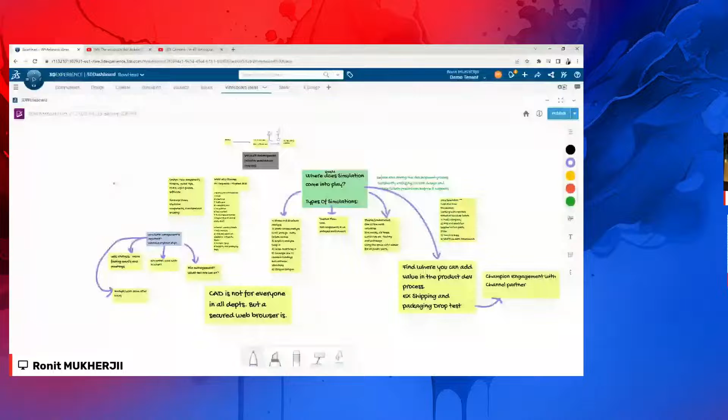So any medical device company would have - let's talk about the different departments you'll have, Brad, in a medical device company. What are some of the departments you think you'll have? Well, obviously R&D, engineering. Were those separate in your experience? Most of the times they can be combined together. So R&D separate, engineering... well, then you might have testing might be separate from engineering. I'm not sure if production and testing might be a different department. Manufacturing, whether it's in-house or you use outside vendors.

Then, of course, you've got sales and marketing - that would have a big impact. You probably have a big legal staff that has to deal with regulations. Those are just the ones off the top of my head. What have I missed? I'm sure there's a lot. You nailed most of it. So I took a little note down.

So you've got mechanical, electrical, you've got software - you've got a PCB, and software running everything behind it. You've got a software team, a manufacturing team, regulatory like you mentioned, doc control - there's a doc control team managing all of your documents.

Like every ECO process, you're gonna have that. And you also have shipping and warehouse - a team that's in charge of allocating lot numbers and taking in shippings that are coming in. So that's a whole different team as well. And every time you make a change, you have to make sure that every single department approves that change. That takes time, man. That takes time.

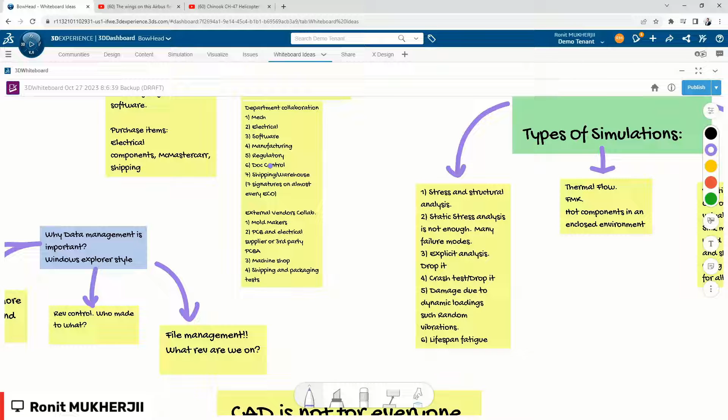So you want to make sure these changes that you're making are less and less. You want to be able to analyze your changes before you make them, and before you go to the ECO process. That's the key.

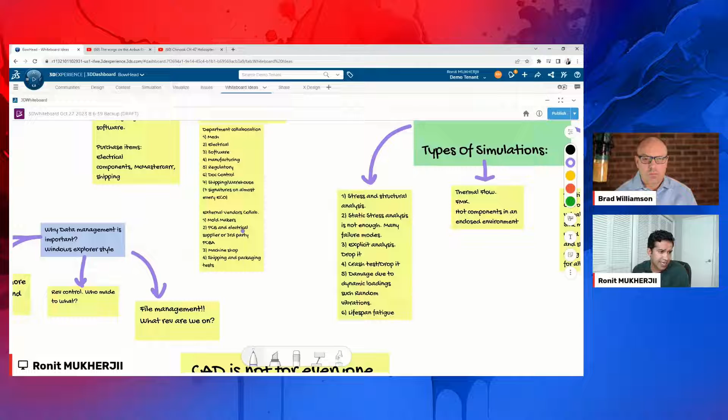One of the other challenges I ran into when I was working in the industry is, let's talk about mechanical, electrical, and even software and manufacturing. All these four departments will be okay using design tools, simulation tools, electrical tools or things like that. But every other department, they're not okay using SolidWorks. They're not okay using simulation tools, and they don't have to, because they're not running any analysis, they're not running any design work. But they depend on the data - whether it's an image, a PDF, a drawing.

So how do you deliver the data to them? They don't have SolidWorks licenses, they don't have simulation licenses, but they need to see the results. They're a part of the ECO process. And if you're justifying, hey, I'm changing this component's size to this because it's breaking, they need to see that results to be able to approve that ECO for you, right?

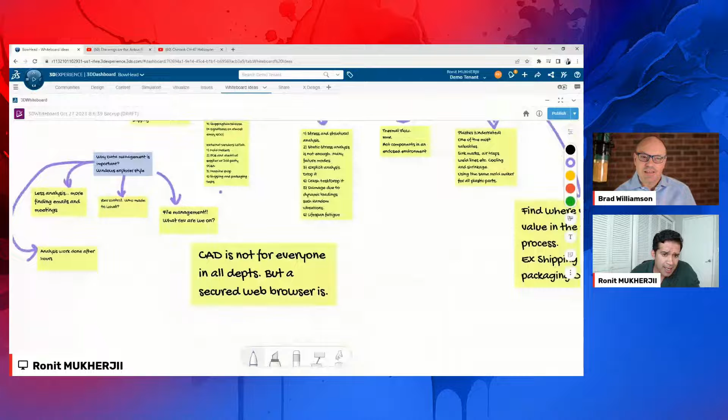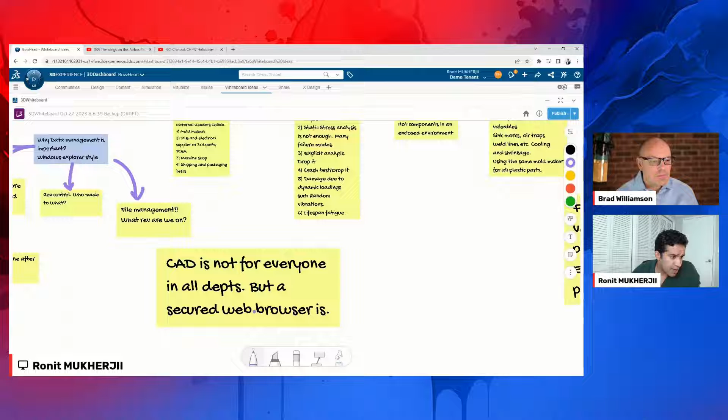The reason why I was bringing this up is that these tools are not for everybody. Regulatory doesn't want to use it, doc control doesn't want to use it, but the web browser is for everybody. Everybody loves a web browser, and they can access a web browser.

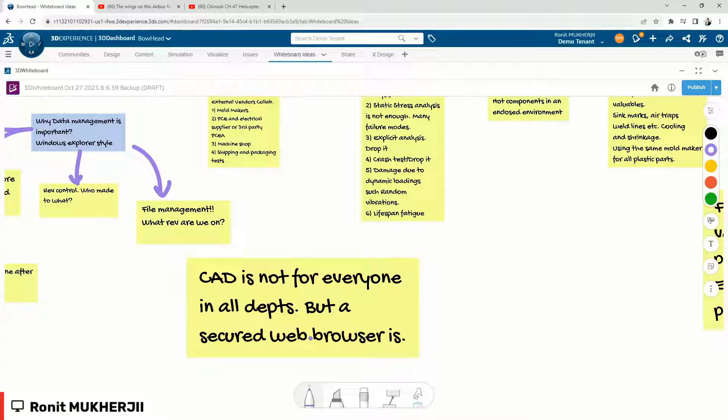So I want to show you, Brad, what I have over here. This is my platform, this is my dashboard. This is what I'm working on right now. It might seem like too much, but let me give you a quick rundown of what we're looking at.

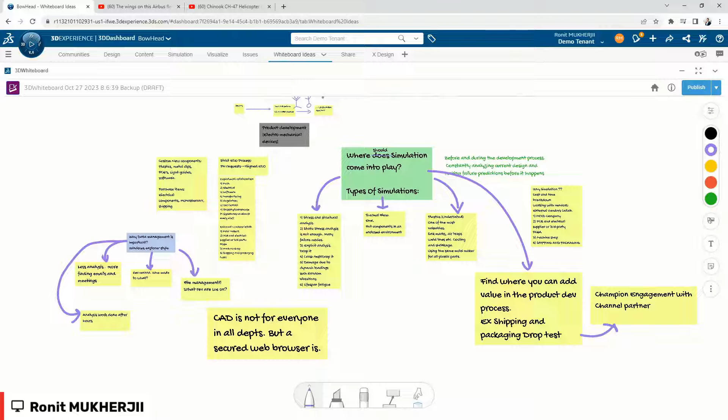I've got a couple of different tabs up here. This is my whiteboard ideas tab. I've created this tab where I've got a lot of information in my brain, and I like to throw it down so I don't forget about it, or I can come back to it. So this is where I jot down all my information, things I want to work on eventually, and some random ideas.

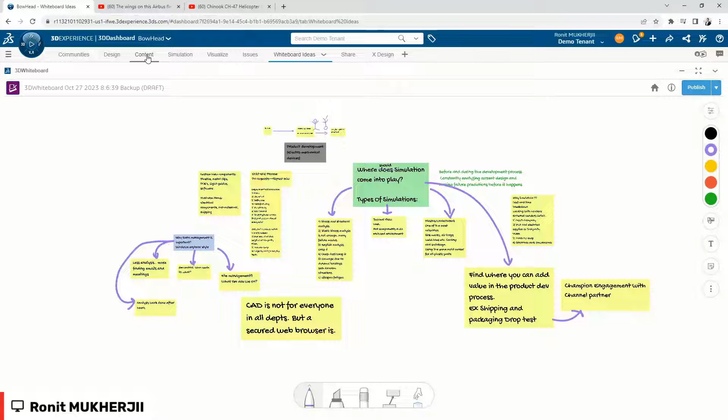Now let me take you to this content tab. What I am working on is this Bowhead model. You must have seen, our team created these fantastic videos of what's new in 2024 — this was the model that was used. That's our customer, Bowhead in Canada, and they make off-road cycles for people with IDD or any kind of physical limitations.

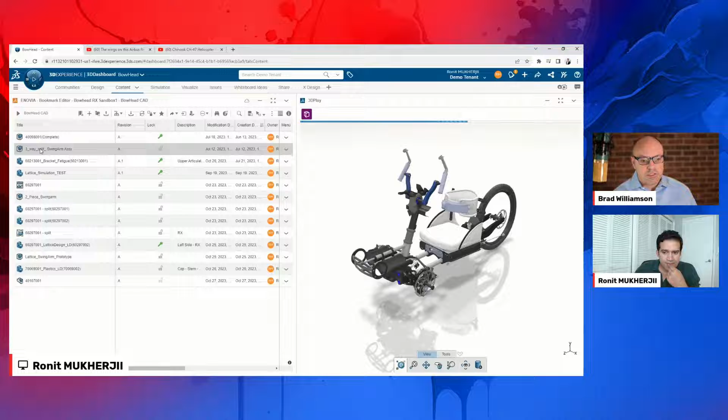Correct. Oh, wow, I mean, you made some mods to this. This is cool, I wasn't expecting to see this. I mean, surprised, right? I wanted to make sure you're surprised on this one.

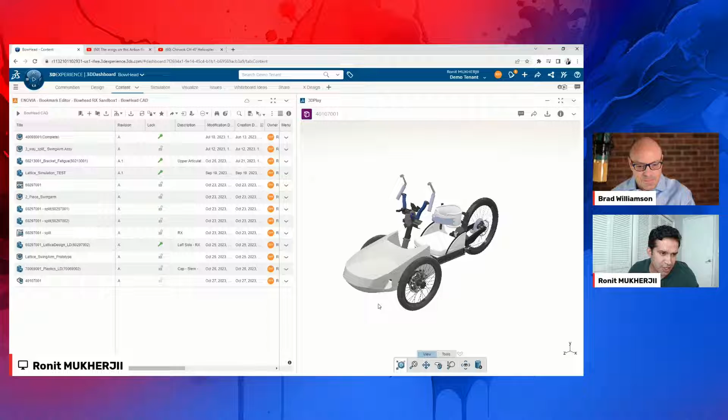So I want to actually show you what I've done in this dashboard and how I organize myself, and then I'll jump into some simulations. There is an issues tab. When we were looking at this entire Bowhead model, we tried to dissect it in different places to understand how different components will act and behave when we run it through some simulations.

Starting with just a basic swing arm design — it all starts with one design, and then eventually you make revisions and updates, and there's a whole process until you get to a final design that you like.

When you're working in a team, Brad, let's say, if you're working in a big company, you're going to have one person that's an analyst, one person that's a designer, and a couple of people that can do a few different things — lots of contributors. But when you're working in a smaller company, you don't get that luxury, and you just have to wear multiple different hats. Sometimes the designers are the analysts.

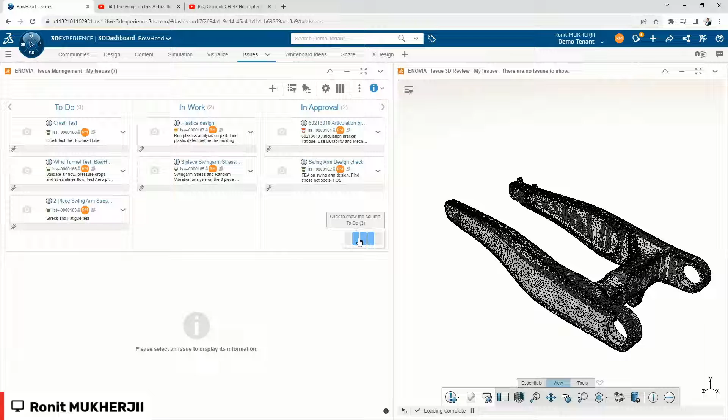And I actually like that — I want the designers to be analysts, because now you get to design and analyze at an early stage. Whereas an analyst, if you think about their role, gets the design to analyze almost towards the end — 'we've done all this great work, can you analyze this and make sure it works?' I believe that's a little bit of the wrong approach. We need to be analyzing these things as we're building it.

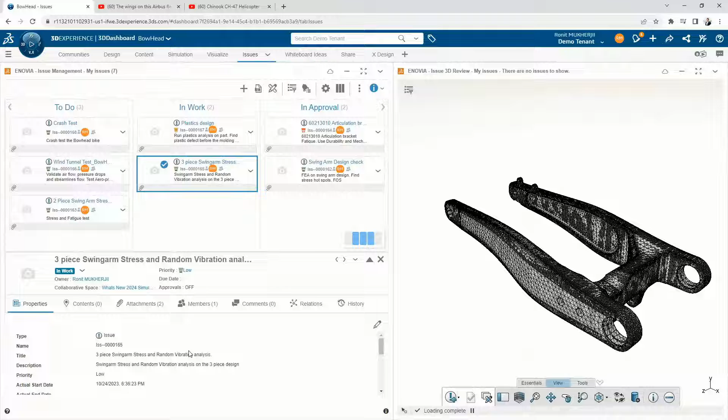So if I'm making the swing arm, I want to analyze the swing arm and see if it works well or not. I have a few different tasks, or issues, that were given to me, where I can select one and it gives me all the information about what I need to do. So this is a two-piece swing arm — stress and fatigue test. Just like that, I have different tasks I've created based on this Bowhead model, covering all the different areas, including a comparison between a two-piece and a three-piece swing arm test.

I was talking about this plastics design — I want to make sure that this plastic design is good to go. And then there's an articulation bracket, a fatigue-type issue I want to talk about. So there's all these issues that I've created in an organized manner.

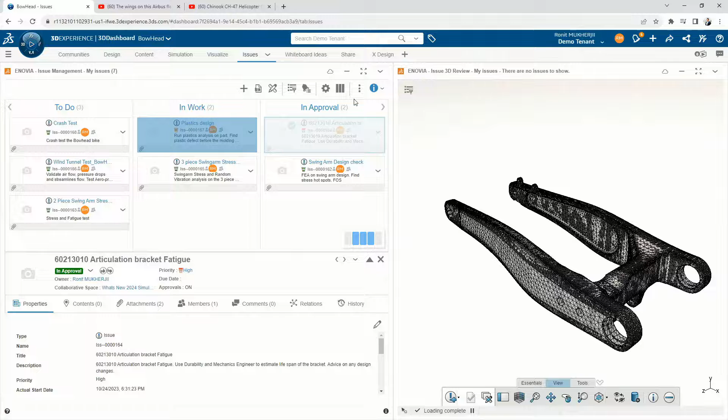If I show you this data grid view, I can see what's to do, what's in work, what's pending approval, things like that. So it kind of gives me a little bit of structure. Man, when you don't have this kind of structure, you have to go back into your emails and kind of see what you have to work on. I used to write this on a Word document or a sheet, all the things that I have to do.

I'm trying to think, if you work in an environment like this too, where you're managing these multiple tasks within a project, how do you keep track of those? I'd be glad to hear from folks in the viewing audience how they're doing it. But yeah, the first thing that came to mind was like, well, I'd make a Word doc, or probably an Excel spreadsheet would be my go-to if I didn't have a tool like this.

I used to scribble it on a paper, and I would go back. Yeah, or a sticky note. And I could not recognize my own handwriting. Sometimes I was like, oh my God, what did I write over here? Is that a 9 or a 6? I can't tell. That happens.

So this has given me some structure, and I really like it. So I have issues, I have tasks, I know what I need to do. I know the priority on it, and I can address it as I go. Okay, so which one are you going to tackle here first?

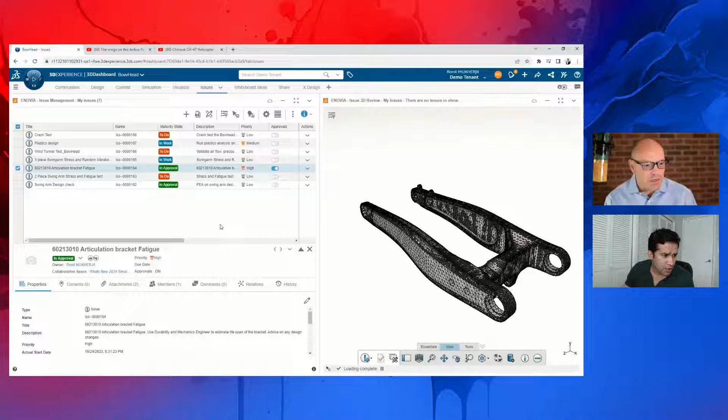I'm going to show you a bunch of them. So this is just issues. Now let me take you to the simulation tab. I have addressed, or I've started working on some of the simulations. Some of them are completed, and I don't want to go search for it again and again, hitting search in a demo to look for what that simulation is and where it is. What I've done is I've organized all the simulations I'm working on in this bookmark editor.

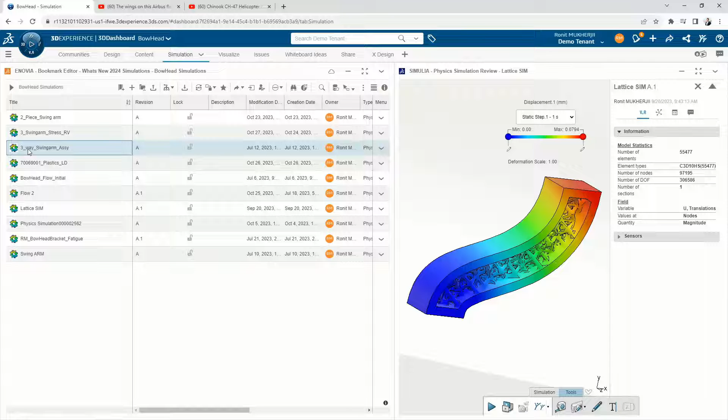On the right hand side I've got a review, like a lightweight results review that you can use. So we were talking about that, the swing arm test, the 3-piece and the 2-piece. Yeah, 3-piece versus 2-piece. Okay, so I've run these studies, and I can open this down the road.

But like I was telling you, the doc control and regulatory departments, they don't have those tools, but they have this. They can use the bookmark editor, take a look at some results, take a look at some screenshots and stuff like that, and they can approve their ECOs and get the results that they're waiting on.

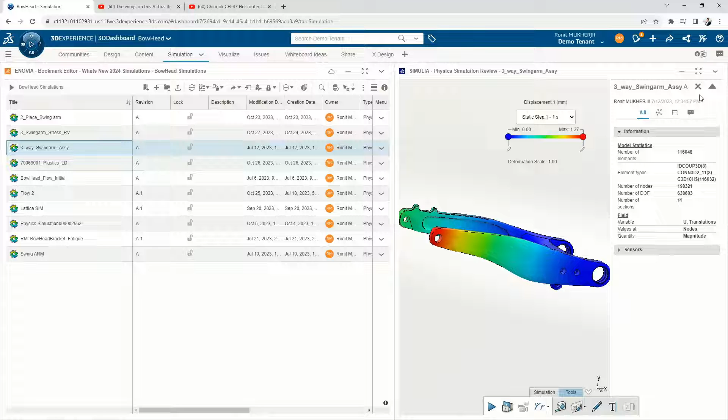So just a follow back to that one. Okay, so over here I just opened up the 3-piece swing arm assembly in a lightweight results viewer. I can take a look at what my displacements are, I can take a look at what my von Mises stress is, and just do some type of lightweight post processing, I would say.

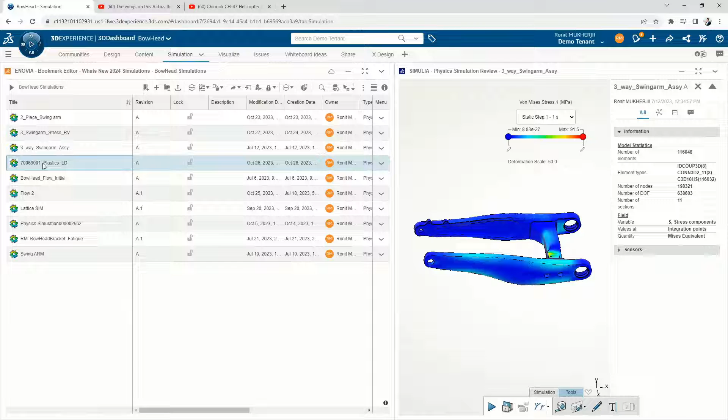Brad, did you see how easy it is for me to just drop that study over here? Yeah, same, kind of drag and drop. If I wanted to take a look at my plastic study, if I run it, of course it's going to show up over here. Now I can take a look at some.

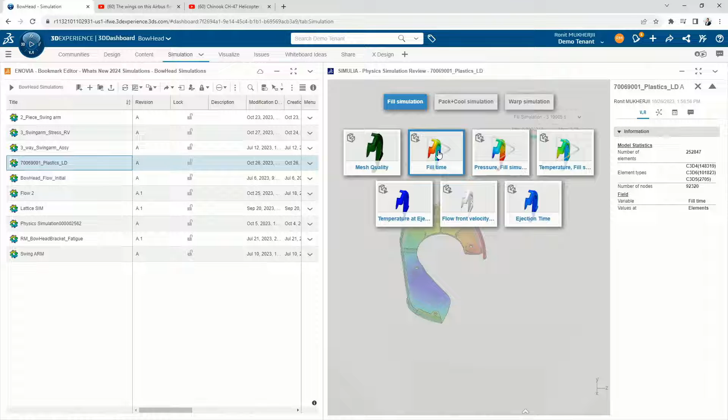Okay, here we go. So I'm looking for things like sink marks, and I think I saw fill time there, so this is very lightweight. Let's see what we can see in this case. So in this case, we can see some pressure, some fill time. I can see some pack and cool, and I can also see some warpage.

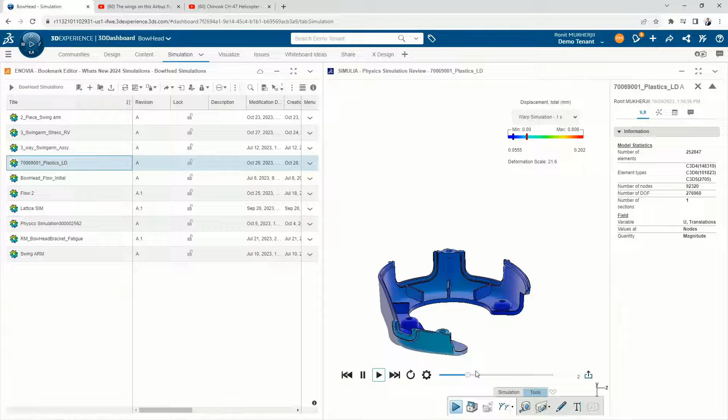So I did create a warpage study as well. When this plastic component cools, how it's going to shrink, so I have the ability to take a look at that and animate it for the people. Look at that, animate it. Here you go. Of course, all of this is lightweight. I have not opened any tool yet.

That's powerful, Brad. That's very powerful. I don't have to wait for licenses or anything like that.

I'm good to go over here.

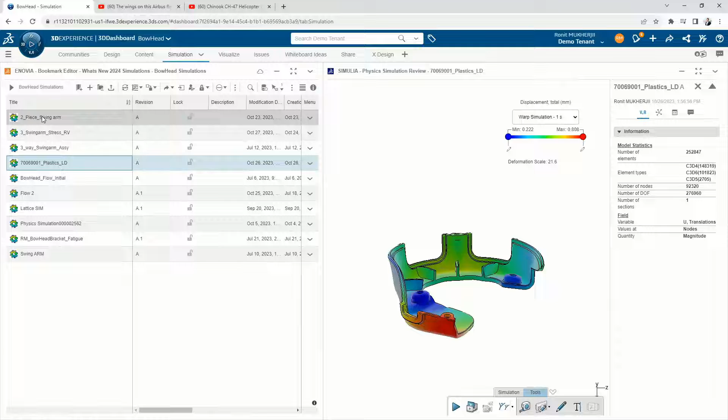When you're an analyst running these simulations, you're going to have meetings where you sit with your team and bosses and explain your analysis, what you've done, what you figured out. For people on their own team, you can actually deep dive. I can open any of these studies and see what was done. Let's take a look at something.

So now you're in the simulation tool here. Right, exactly, if you notice the window changed - this is my simulation tool. I've opened the simulations that I showed you, pre-opened because it takes a little bit to open and show results. So I've already opened it here for us to take a look at.

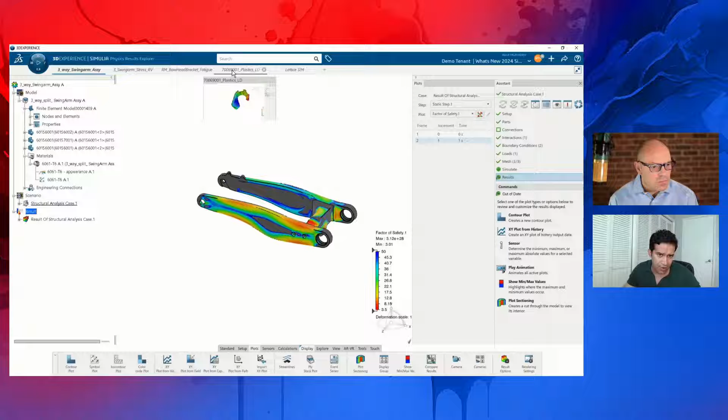Let's start with this simple 3-piece structural analysis that I ran on this swing arm. The goal was just to figure out if this thing is going to work or not - if it's going to fail based on the loading conditions we've added. If you look at your factor of safety or your von Mises stress, that tells you if you're good to go, if you're going to be fine. Von Mises for the 6061 is way above 91.5, and that's the max we see, so we're good to go.

In fact, some people would even argue that this is overdesigned. That's also a case, Brad, where a lot of the times when people don't have these tools, what they do is they just go ahead and overdesign everything so it's not going to fail.

So what is factor of safety like here? It's way high in this one, way above the minimum of 3.01, and that's what you want to look at, right? Minimum is what you want to look at, but also when you're looking at the minimums, you want to take a look at if there's any stress hotspots it's showing - things like that. So it's a whole post-process that goes into it.

But at a very, very early stage, Brad, this can give me an idea if this is going to work or not. Let's say if this isn't working, and if I'm moving forward with this down the road and it doesn't work, then I have to come back all the way, and all the changes that I've made get trickled down.

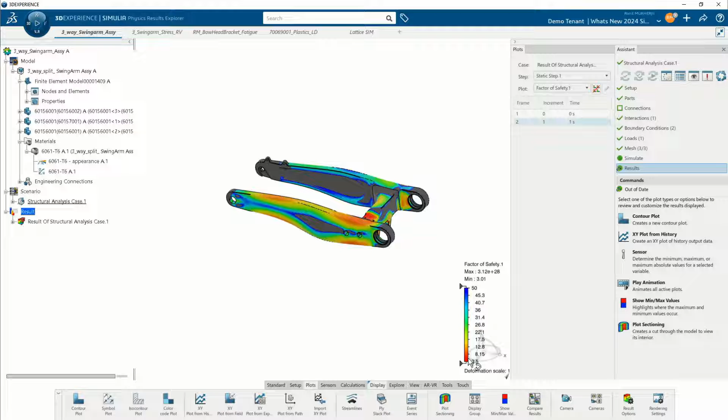I've got a question for you, and maybe somebody in the audience has this as well - if I'm used to seeing stress plots, I've worked with a lot of simulation tools over my career, but here you're seeing gray. I'm used to just seeing a rainbow between red and blue. What's happening with the gray?

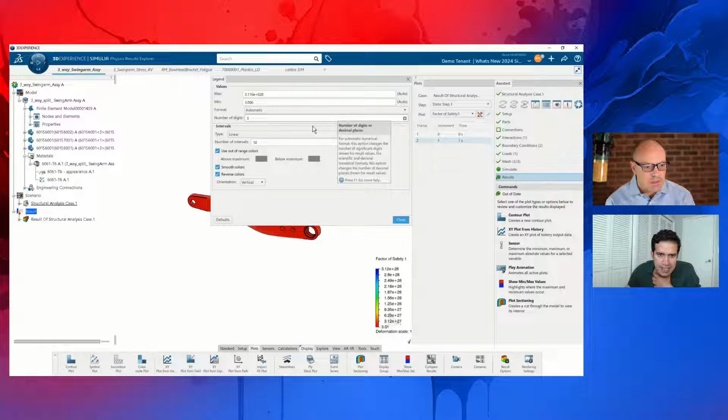That's just something I've kind of updated or moved. The factor of safety is so high that I had to change the color coordination to bring it down - it's everything that's just super, super above. Or what you can do is create sort of an ISO plot where you define two values, and it will show you the value in the middle or outside those values. So you can create those kinds of post-processing plots.

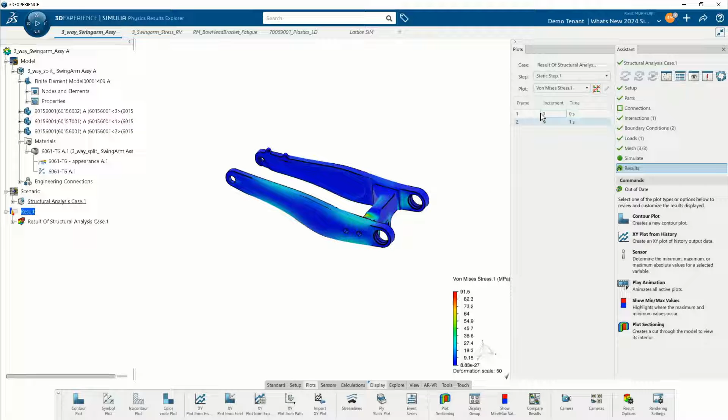But what I want to also talk about, Brad - like I was saying, a simple linear stress analysis is not the only place where we stop. This thing can fail in multiple different scenarios, right? So another scenario could be, since this is a swing arm that goes on an e-bike, it's going to go through so many bumps and there's going to be random vibrations happening. Is this thing going to be able to handle it?

So you want to learn these things. You want to understand how your swing arm is behaving during random excitation, and depending on that, you make your design changes or not. So if you're okay with that, it's great.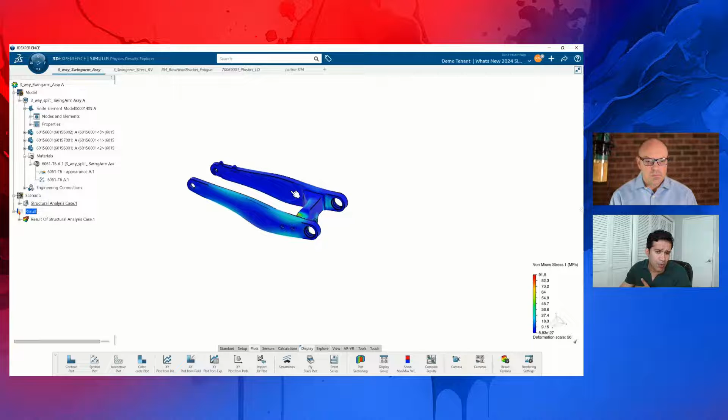So with this portfolio that Dassault Systèmes offers, the 3D Experience simulation portfolio, we've got multiple different roles that can address not just simple linear static or nonlinear studies, but really high level things like random vibration, explicit analysis where you're crashing things and seeing how they break down, or drop tests. So you have a multitude of different multi-physics type capabilities to address different failure modes in your design. One of them, I took this study to the next level and created a random vibration study from it to understand the RMS stress results.

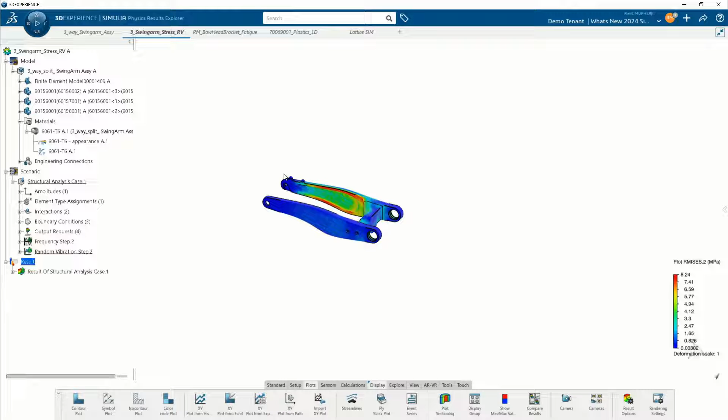Just to show you what I did and what that setup looked like, I want to take your attention to this structural analysis case that I created for this three-piece swing arm. The first thing we do is create a frequency step to understand all the mode shapes, and based on that, you create a random vibration study. Let me just open that up.

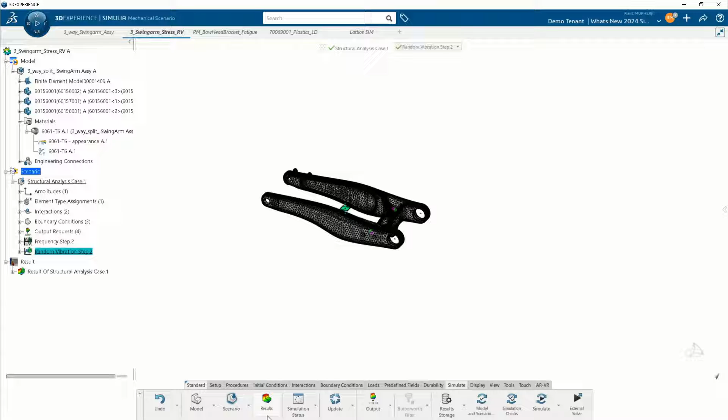You define your upper and lower boundaries. You define your critical damping fraction and your modes. Once you're done with that, and of course your frequency scenarios, this might take a little bit to show results. Let's see if it pops up. Okay, it does.

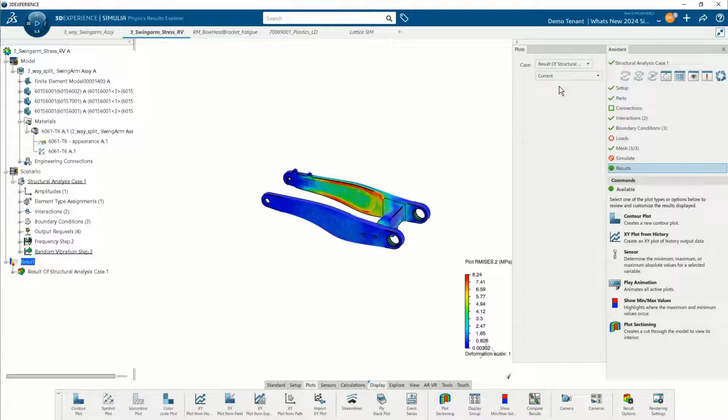So once you have that, you can take a look at your RMS results and stress values, and see how at different... okay, why is it not opening? Let's give me one second, it's not displaying for some reason. My dynamic results, or sorry, random vibration result, but it's showing it over here. So it's fine.

Over here we can take a look at different modes that we have created, and the RMS corresponding to that particular mode shape, or that particular frequency actually. So again, we're not just stopping at static stress or nonlinear stress, we're taking it to the next level and understanding how random vibration works. So we have those capabilities.

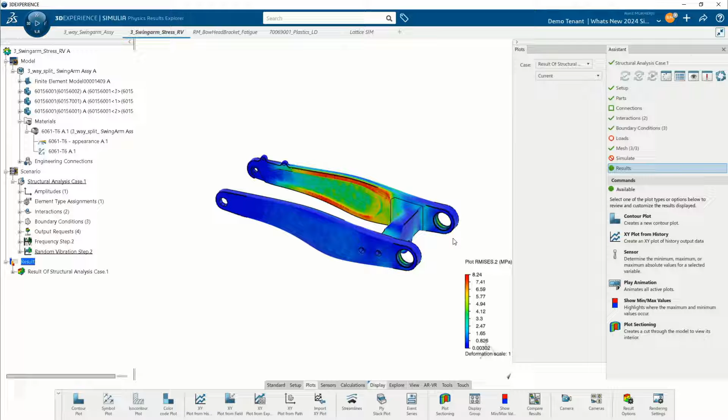Let's talk about another mode of failure, Brad. Fatigue would be next on my list. You nailed it. I'm just going to switch back to a different component, this articulation bracket, which is part of a pretty big piece of bracket that goes under the bowhead bike. There are three of these, and there's a lot of load, almost the entire loads on the front, and the rider load is acting on that.

So when you run a linear stress on it, yes, that works fine. The material that you're using and the loads that we have created, things are great. But that's probably why a lot of times we over design with a large factor of safety, because we don't have the luxury of doing a real fatigue or virtual fatigue analysis.

Absolutely. But when you're over designing, there's a few things you have to keep in consideration. You have to also see what over designing does to your parts or to your entire assembly, and you also have to look at the logistics part of it. So if you're over designing an entire assembly and you have to ship this thing back and forth to your customers, the logistics costs, the shipping costs, all of a sudden things are bumping up. So you should be able to address over designing your components using these tools.

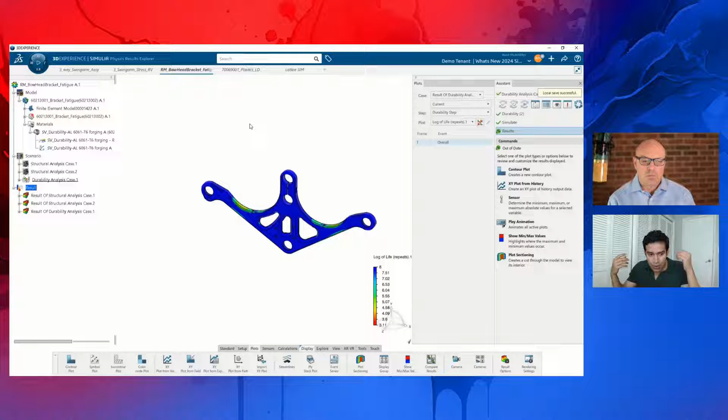Why do we need to over design it? Why do we need to make things so heavy and clunky if they don't need to, right? Same scenario, this articulation bracket I was telling you about, structural analysis works great. But what happens to this in, let's say, 5 years or in X amount of cycles? We don't know that. We want to be able to predict that, right?

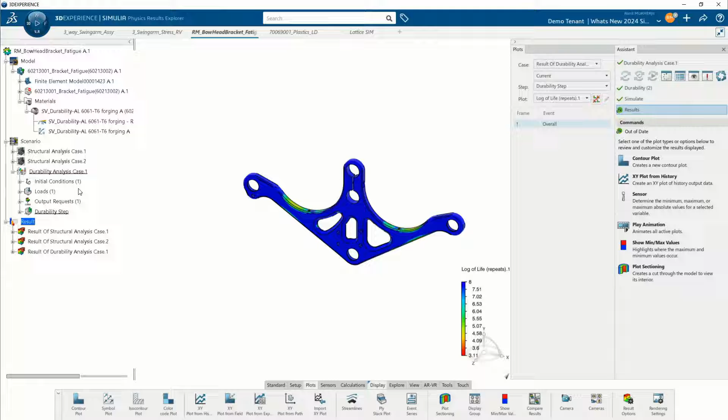So for that, we create a fatigue study. In this case, we create a durability study using our FGM role. You just define your conditions, you define your fatigue loading, and let me jump on it just to show you. What's the loading? What's the load case here? So load cases can depend. When you're doing a fatigue analysis, actually, let me also show this quick video.

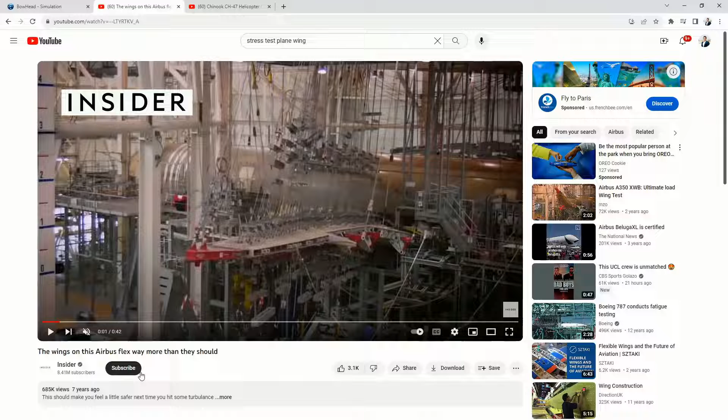Have you been on planes? Yes, lots of them, and I like it less every time. Okay, I'm sorry to show you this. Maybe I'm happy to show you this because it might ease your fears a little bit. What you're looking at, Brad, is the wing of a Boeing or Airbus. I want to show you what they do to test this for stress. Can you see that at all?

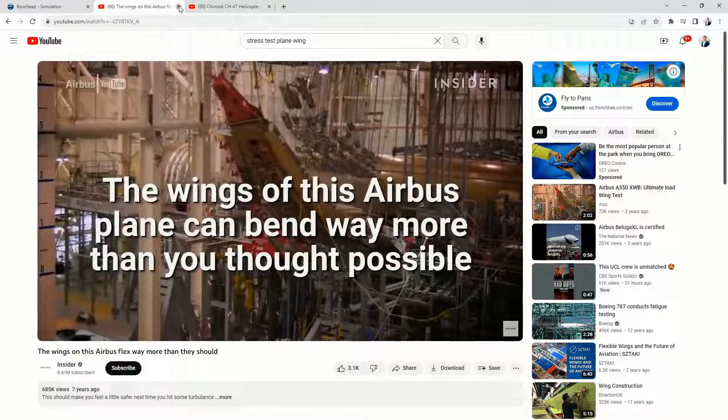Okay, never mind. Yeah, okay. So let's just say we...

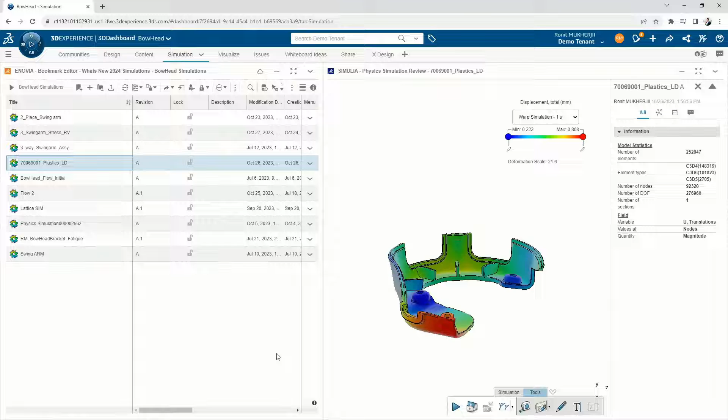Cannot. So when you're testing the wings of those Airbus, they are putting it through lots and lots of cycles, and they are flexing this wing all the way to the top, all the way to the bottom, all the way to the top, and they keep doing it.

And I think we have to diverge from the video because of some copyright. Okay, cool, we can. But we can imagine what's going on there.

Perfect. So what you can do over here in the loading cases, you can create those scenarios. Let's say if there's a certain type of load acting on the wings, or in this case on the side, at a certain amount of newtons. And then you have another load acting at a certain angle at different newtons.

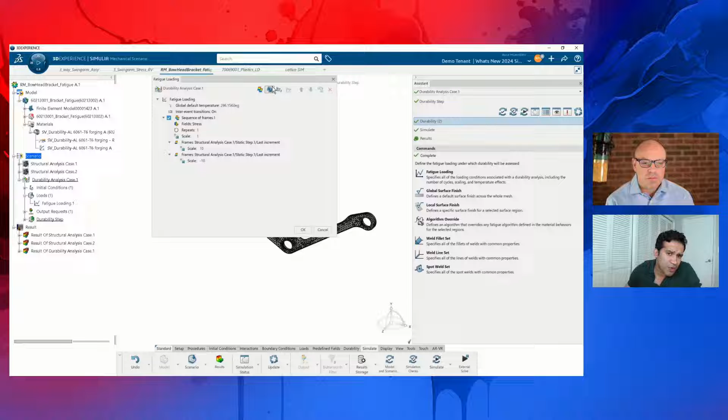So what you can create is a sequence of frames, superimpositions where you tell the software, hey, scale this structural load 10 times, or apply it a certain amount of times at a particular increment. You can create multiple of those sequences. So I can create another one, some superimpositions where I'm basically superimposing the loads that are happening.

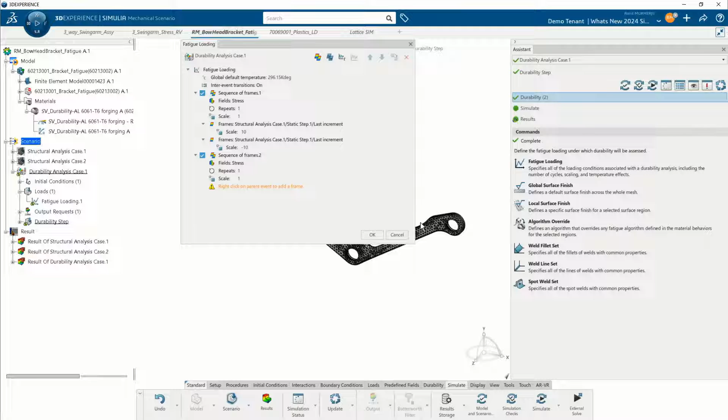So what you want to do over here, Brad, is create a sequence that realistically depicts what's happening in your model. Does that make sense? Yeah, in fact I hadn't heard that term in a while, but now you're digging deep into my hard drive - the superposition of load cases. Okay, yep, I remember that.

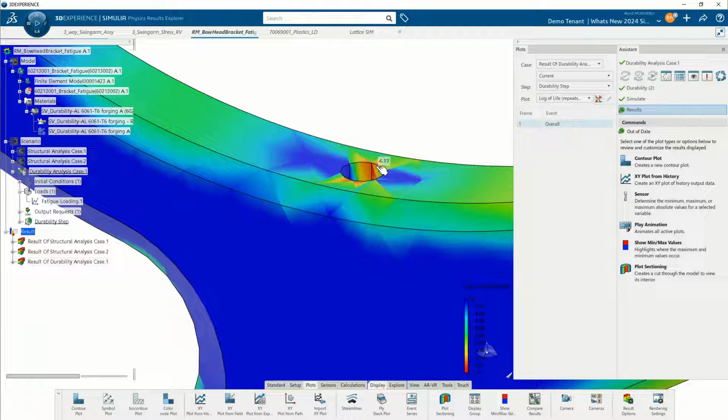Correct. And then running the study, the software is able to tell you the log of life, how many cycles we'll get out of this. You can already see down here the minimum log of life, the minimum cycle is 3.11, so 10 to the 3. But if I dig a bit more, I can see the maximum is happening on that edge, so this might just be a hotspot.

This might not be a realistic value to look at. So I'm looking at the overall thing, at this area, the green, yellow, blue area - that's what's happening on these edges. So I'm going to say the log of life is around 10 to the 5.5, whatever the number of cycles. Again, a quick analysis was able to give me this value, right?

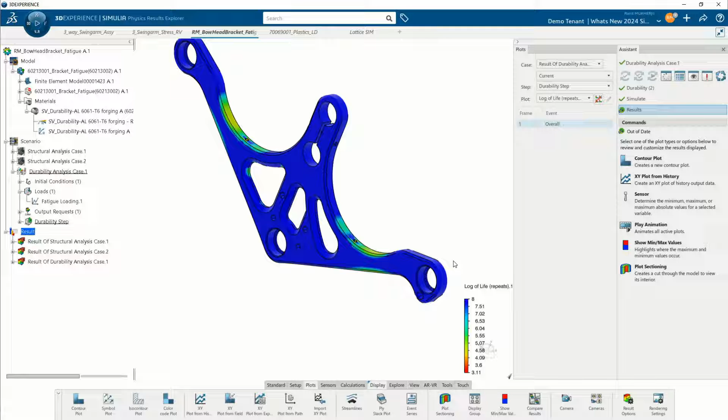If I'm not happy with that, if I need more cycles, what we can do is jump into my SOLIDWORKS design right away. I can select from here, go into SOLIDWORKS, make that design change, and bring it back. Just hit update, refresh, rerun the study, and you're good to go. Now with the updated results, I can verify my log of life is better, and now this particular bracket is not going to fail at X amount of cycles - it can go up till X times whatever.

Yeah, that's an important point too - when you make that change in the design, it updates immediately in the simulation environment. It's not like an IGES or a step output, it's the native geometry. Correct. So of course you have to hit the update button in the simulation world, so it can connect to where this part is coming from, where the information is coming from.

What's really good about that from a data management standpoint is you don't have two separate copies, like a CAD model and then the CAD model that you use for analysis. They're the same. It's the same piece of data.

I love exploring tools, Brad. I want to see what we can do with the new technology and what's happening new in the world. You must know how, in recent years, metal 3D printing has just taken off. Everybody's interested in metal 3D printing and lightweight components and things like that.

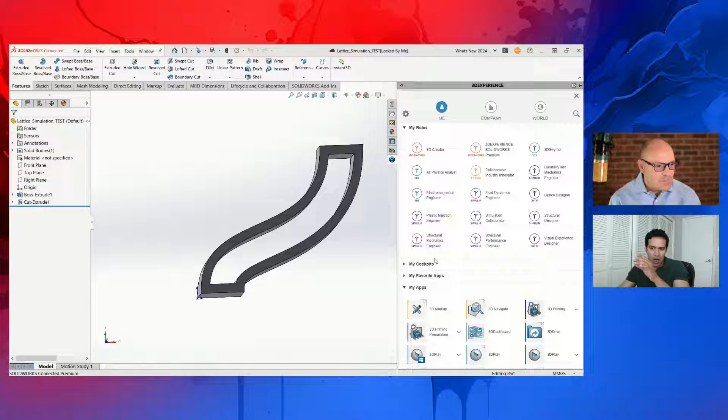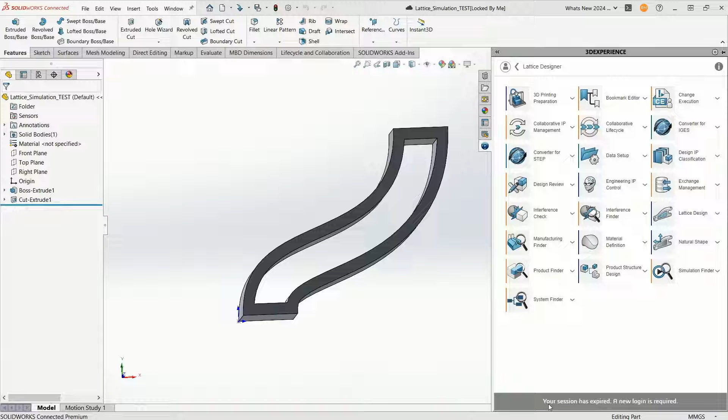Correct, simple SolidWorks. On the right hand side I'm connected to my 3D Experience platform and all the tools that are available to me. One of those is the Lattice Designer tool. Under Lattice Design, I'm going to just launch the tool and hopefully it opens up. Live demos, everybody, anything could happen. Okay, I've got a new login I have to go through, let me see if I need a new login.

If not, then we can of course take a look at the plastics. All right, come on. All right, we'll come back to this, I'll just have that set up in the background so we can come back to it if that works. If it doesn't, then I definitely have something to show you with the results.

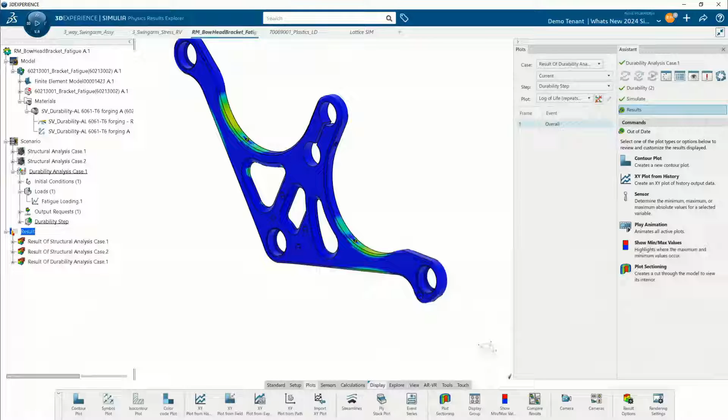So the Lattice Designer, is that simulation? Is that a simulation specific tool? Question coming from the chat here. No, it's a design specific tool. It's a CATIA tool that allows you to create lattice designs using your model.

Right now that tool is more compatible with X-Shape, that's where we want it used as well, but I figured out a way how we can use SolidWorks models in Lattice too. So sometimes it works, sometimes it doesn't, because it's not supposed to be used that way, but I'm still trying to use it that way. It's still evolving technology there.

I'm sure in the next couple of updates it's going to be in a very good place. But to answer the question, when you design a lattice, it's not reliant on a simulation. It's a design tool first. Correct, makes sense.

Then I wanted to take it the next step. I wanted to bring that lattice design into simulation and run some analysis on it and see what the stress value sort of looks like. It's got some cool results if I'm able to open it. But so this is all structural.

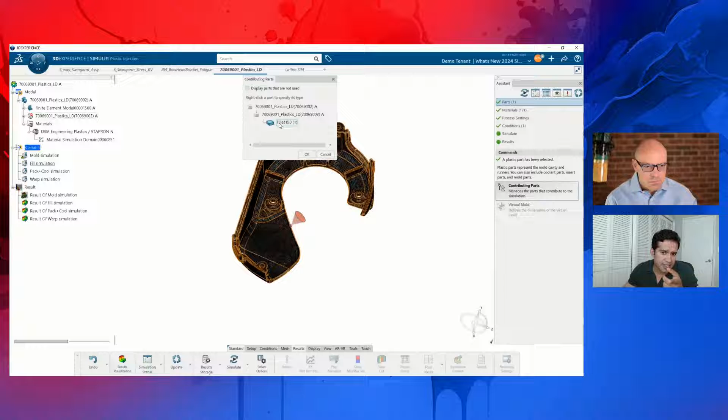You start at the top and go down one step at a time. The first step is asking you what's your contributing parts? What parts do you want to run? So I've got this plastic part. When you click on it, it's going to ask you to select that part. It's going to ask you, hey, this is the part, select it, and what can you do with it?

So you have a few different options. You can run it as a plastic if it's a simple plastic. You have a hot runner, cold runner system. You can do insert parts. You can do coolants, mold inserts, a lot of different options right here.

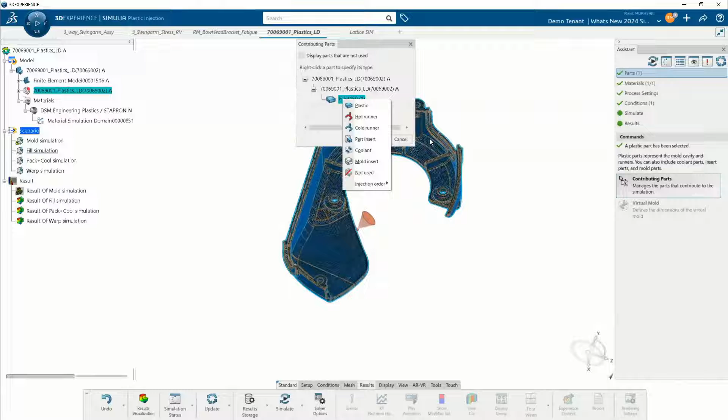But this is a simple plastic part. I just want to see, as a simple design engineer, if this component is going to even fill properly, or if there's going to be any defects on that, right? So I select that, then I go to the next step.

Next step, it's asking me to select a material. We've given you a library of tons of plastic materials that are from the industry, industry standard plastic materials that you can select from.

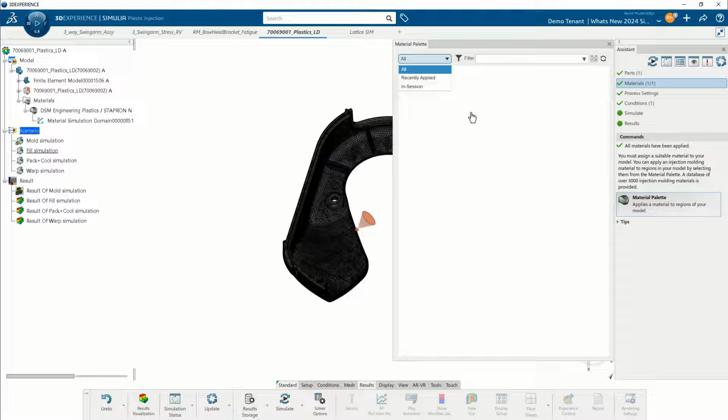Of course I forgot to hit refresh, so I should probably do that. It takes a second to pop up. Come on, it's thinking and thinking. Okay, well you get the idea. You've got a material palette with lots of materials. But it's taking a lot of time because there's a lot of materials in there, so maybe I can cancel out of it.

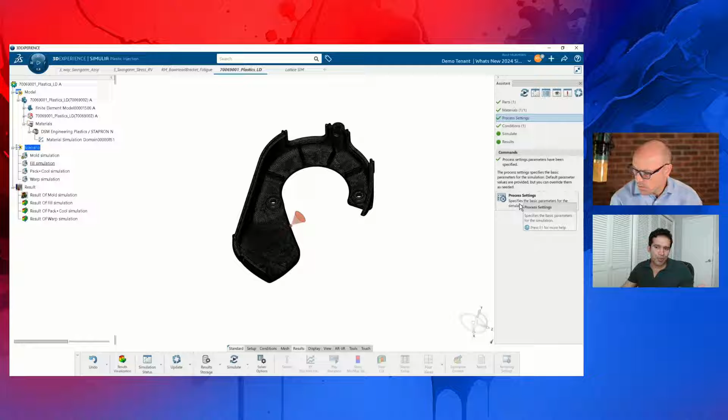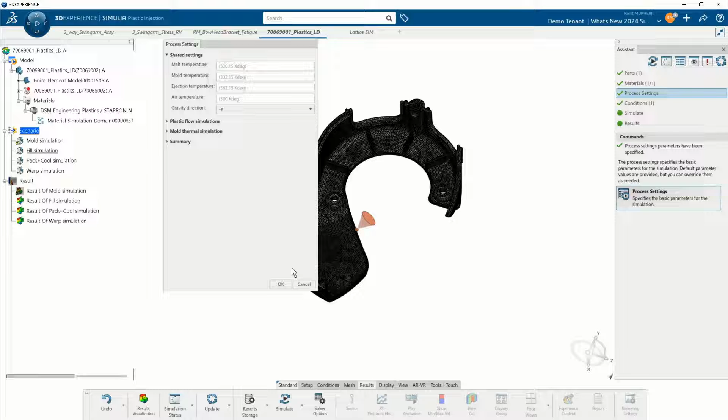Okay, great. So once your material is set, then you go into your process settings. What are your process settings? Basically, what's your melt temperature, mold temperature, and if you have any fill simulation information like pressure limits and switch points, things like that, you can add. But I'll keep it at default. Most of the time, as a design plastics engineer, you want to keep it at default, and you just kind of hit OK to that.

Next is your conditions. You want to tell the software where does the plastic enter into my mold, or where would that location be? If you have enough plastics knowledge, you can perhaps start picking on areas that you think are going to be good as an injection location, or just use auto location, and it's going to choose the best location for us.

That's what I do, and that's what I would use too. It has never failed me, Brad. It has never failed me. So, of course, you can define some valve gates, coolant inlet and outlets. So you have some other options. That's it, you just simulate after that.

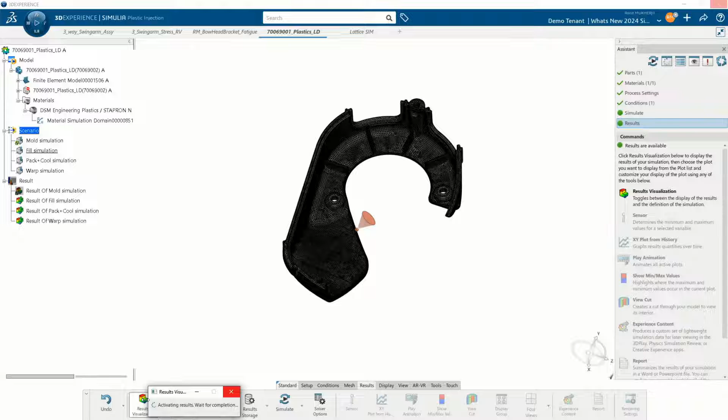Click simulate, and once your results are done, let's take a look at some results. This is going to give us a really good first pass, I would guess, right? Just taking some rough guesses of a few things, or not so much guesses, but some defaults. And this is going to get us closer than if we hadn't done anything, for sure, right?

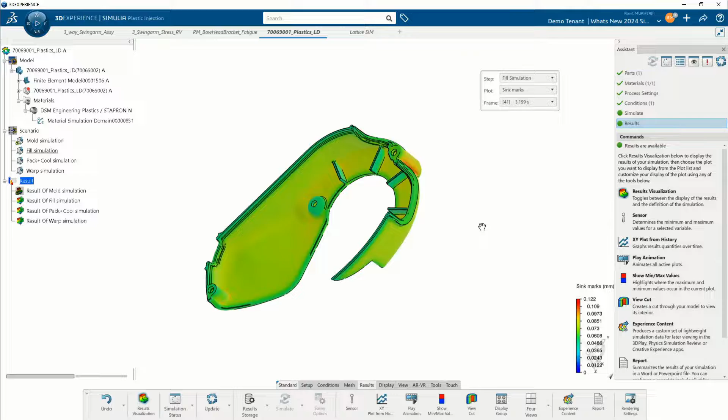Absolutely. So just a quick post process, I can take a look at weld lines. I can take a look at sink marks. Now you notice this area, kind of jumped on me, but this area is pretty thick. And when it is thick, you are going to see some sink marks on it when the plastic cools.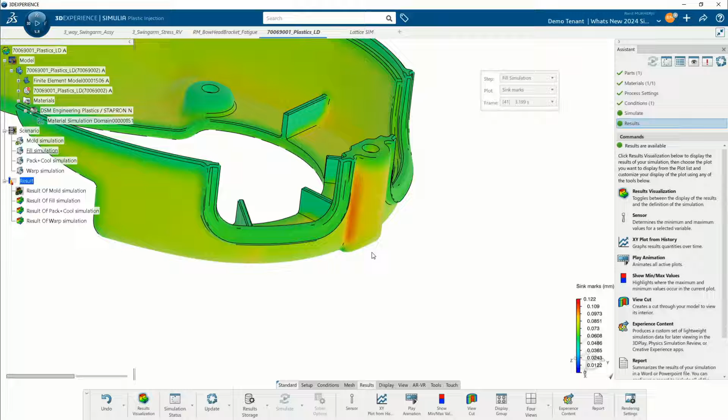When the plastic is thinner somewhere and thicker somewhere, you will have different rate of cooling. So you'll see some marks which are aesthetically not pleasing, and also these can be very structurally weak as well. I was working on this model earlier, Brad, and these ribs, these ribs were big.

So when I ran the plastics analysis on it, I had some major sink marks over here. You can see some light ones now, some light sink marks here. Yeah, these were pretty big, pretty prominent. So making that rib smaller right away, before even reaching out to my mold maker, I could address this - that rib doesn't need to be that thick over there. I can make that change here, run the analysis, and when I send this to the mold maker, these issues are not going to pop up.

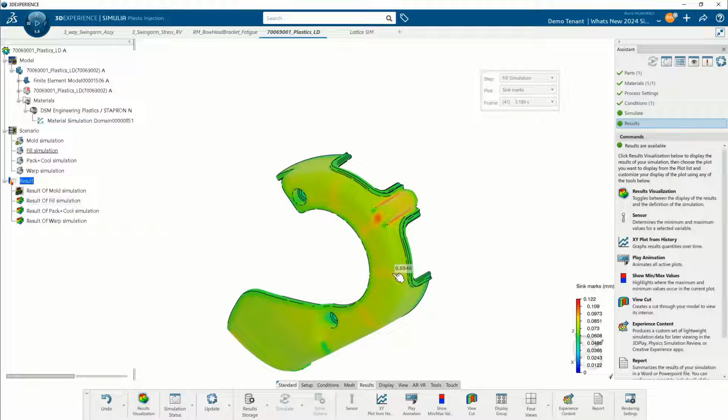There might be some other issues, of course, that pop up from things we might not have addressed, but that's less than what we'd run into if we didn't run any analysis. I always say, running these simulations is not your last step. You don't just run the simulation and go into production - nobody does that. You run the simulations, get closer to the one design that's your final design, run a couple of tests on it, make one or two iterations if needed, and that's your final design. So you want to eliminate as many physical prototyping steps as you can. Correct.

So like I mentioned, plastics for me is so underrated because of the amount of time it can save. I highlighted some of those time slots for how it saves time when you're going back and forth with the mold maker. And it's not just time, it's your peace of mind as well. You'd rather be doing better things with your time than emailing back and forth with your vendor - you want to be able to address these things.

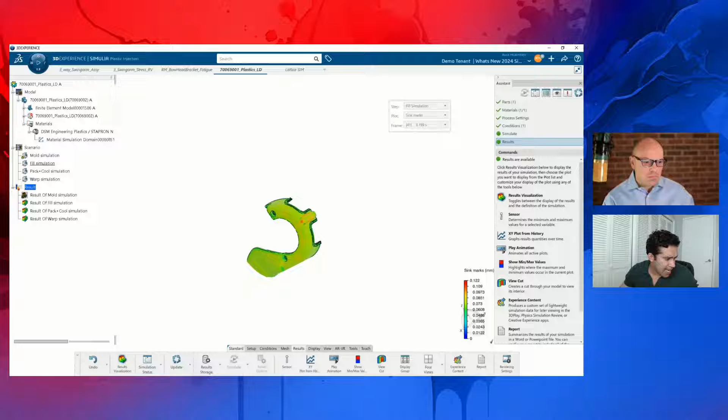So I've addressed structural, shown you plastics, but there are so many other things in our portfolio we can take a look at - multi-physics capabilities that address different scenarios and different areas. To show you, I'm going to quickly jump back to one of the things I have to work on. I haven't started this, but I wanted to mention it to you.

Once this loads - this crash test where you saw the whole bowhead bike with the front bracket. Let me see if I can open this again, and I want to show you what my next goal is, what I want to do with that tool. What I'm trying to do is two different things: first, a crash test. I'm going to use the explicit solver from my structural portfolio and run it into a wall - just run it into a wall. It takes quite a long time to set something like that up, you have to prepare your simulations accordingly. So perhaps that's for one of the next sessions.

You've already explored a lot of things where design level simulation - the kind of things built into SolidWorks simulation tools - you can do static, you can do some vibration and things, but when it really gets hairy, this is where you want to go. And I'm not just saying that, the industry says that. The reason the industry says that is because behind all these tools there's a powerful, industry-leading Abaqus solver backing all of this stuff up. You don't have to listen to me, you listen to the Abaqus.

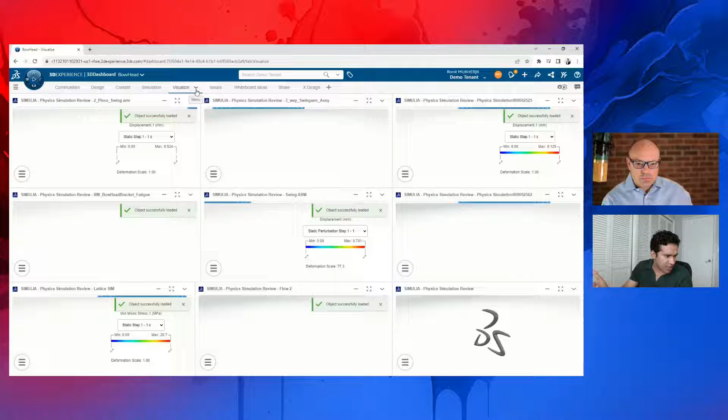You give them access depending on what level of access they require. So if it's someone who just requires a quick view of the analysis and the results, you can give them this. Oh wow, so you see what's happening over here?

This is a lot of eye candy, what's going on? I love eye candy. Simulation is cool, and we want to show simulation as a cool thing. It's one of the coolest things that have happened to me.

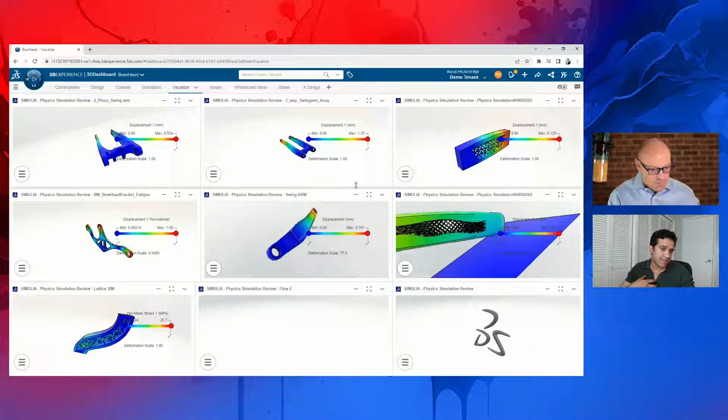What you are seeing over here is a tab that I've created to visualize all my simulation results. I can fill a couple more in, it's up to me how many I create. If this is too much for you, create 4, create 6. If you have 5 results, create 5, but you can have a tab where you bring all your results in one. This, in my opinion, is a very powerful visual aspect we can show.

So you're seeing some displacement results. I can maximize any one of them and change what I want to look at. Let's say if I want to take a look at one piece instead, I can do those changes.

I did want to show you something cool - remember I was mentioning the lattice design? Since it's asking me to log in again, I'm not going to bother, but let me show you some results that finished. I was able to create experience content with the simulation I ran, and that allows me to look at the lightweight results over here.

Again, simple, we're just looking at a structural study - a von Mises stress result on this lattice structure. Let me animate that to show you what it looks like. You can see how the stress is distributing throughout the lattice structure over here.

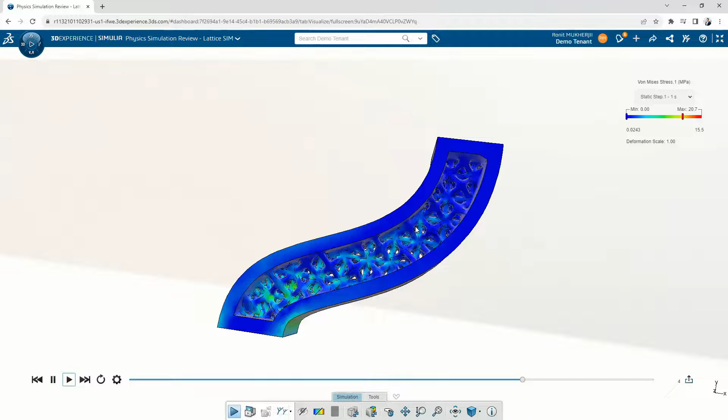It looks like you could lightweight that a whole bunch more even. This was just a starting point. What I can do with the lattice designer tool, Brad, is play with the size of the lattice, play with the shape of the lattice. I can create honeycombs, diamond shapes, a smaller radius, things like that.

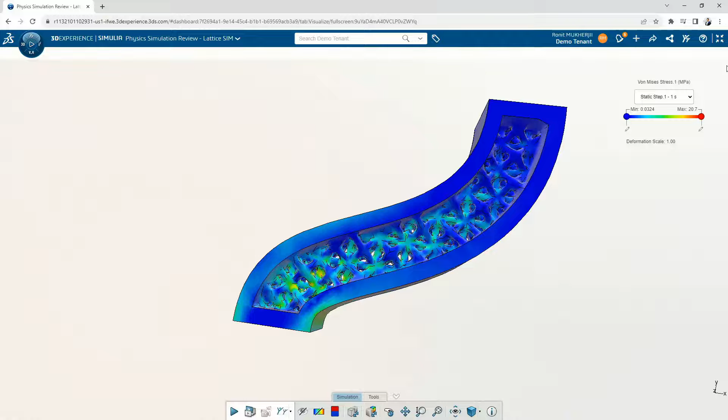This will be fun. So you're gonna promise us an episode just on that at some point, right? Because I really want to see how you play with all those different variables. Absolutely, I will do that, 100%, I will get you that.

But one of the things I don't want to forget about - I was going to forget about this - I was mentioning explicit, right? Again, I'm just playing with the explicit results.

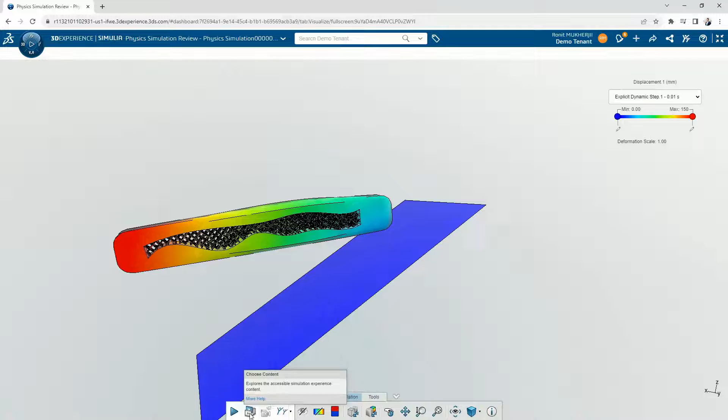I wanted to take a look at how, if this swing arm runs into something like a tree, what happens. And instead of a swing arm, I wanted to see if there was a lattice, if it would still be okay.

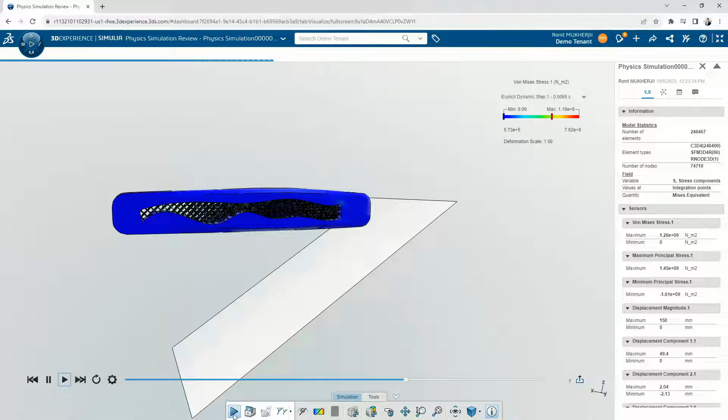Again, I'm in much exploration stages, right? I'm just trying to see what these tools are capable of, what we can do. And you can see how it kind of hits there, and then there's some stresses that go through it.

What's our time duration on something like that? This is like microseconds or something, isn't it?

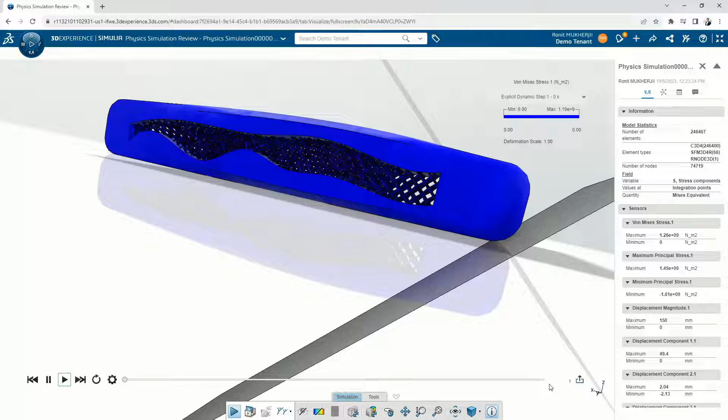Time duration in the sense, how much would it take to set this up and run the study? No, I mean time duration of the event. Oh, yes, these are super short duration events. You can create a custom one, but this would be like, I think I did everything within 0.01 second. So multiple iterations of 0.01 second, I believe.

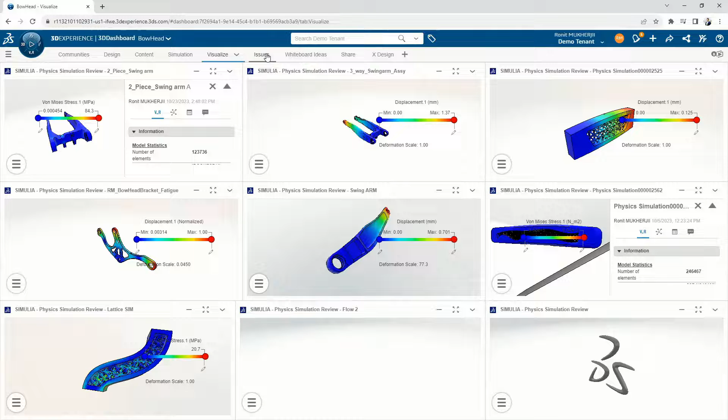Again, super cool, and I'm able to... this down section I was keeping there for some flow results. That one issue I mentioned, where you have the big assembly and you've got the shroud up front. The reason why I wanted to have that was, one, was crash test. The second, I wanted to run a fluid dynamics analysis on it. I want to see

how much air is there, what's the airflow around it, because aerodynamics. So there's a couple of reasons why, Brad.

This is an electric bike, and let's say you want to take this bike on a long run. I'm not sure what the battery life is for this particular bike, but I want to go for a longer run. Do you think if I have a more aerodynamic shape, also a lighter shape, I will get more from my battery life if I'm going uphill, and I'll be able to get a little bit more mileage?

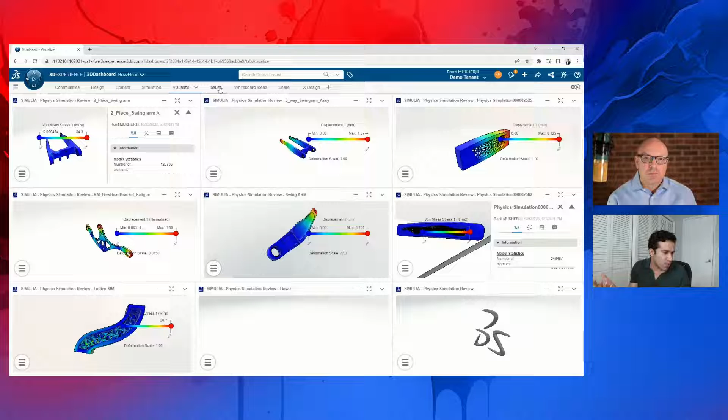Well, you'd think so. I don't know how quantifiable it is, but sure, let's go with it. So a little bit, right? You're not working so hard against the wind. But again, you have to compare that with what happens to the weight if you add the shroud. So there's a few things you have to take into consideration.

But that's what an analyst is. That's what an FEA analyst does. That's a job every day, right? You have a couple of different scenarios, and you want to take a look at which scenario is the best. Sometimes none of the scenarios are good, but you have to pick the best of the worst.

I guess it brings everything around from what you were talking about earlier as an engineer and as an analyst. As an engineer, we sit around and think about what-if problems and solve those all the time. But if your only tool for validating those is a physical prototype, it limits what you can do, what kind of problems you can imagine, and that constrains your design. I think what you were talking about at the outset was the lack of tools. Well, what if you had the tools? I think that's what you've given us a glimpse at here today, which is really great to see that there are all these different solutions.

Ronit, we're getting close to the top of the hour, but if you wanted to start bringing this back around, what are some of your closing thoughts about your day-in-the-life experiences vis-a-vis these tools you've discovered? How did that help you in your career as a product designer and analyst?